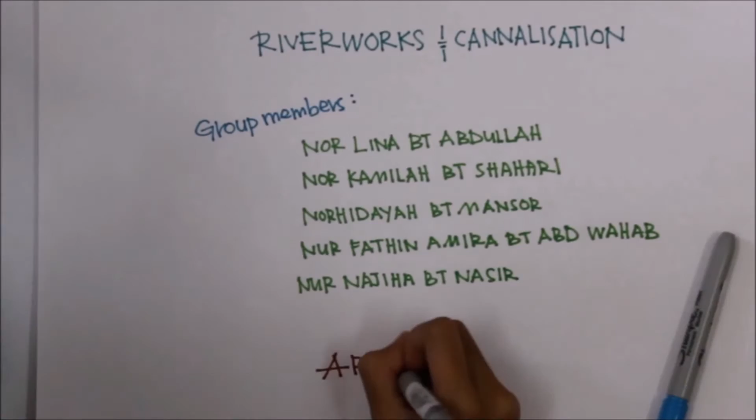So this is my group members, Nor Lina binti Abdullah, Nor Kamilah binti Shahari, Norhidayah Mansor, Nur Fathin Amira Abdul Wahab and Nur Najiha binti Nasir. And we are from AP 2246B.

Alright, now as for the introduction, I would like to introduce you to the canalization and what are the three strategies of canalization. Alright, so basically, canalization is a deliberate attempt to alter the natural geometry of a watercourse. And for the three strategies, we start with realignment.

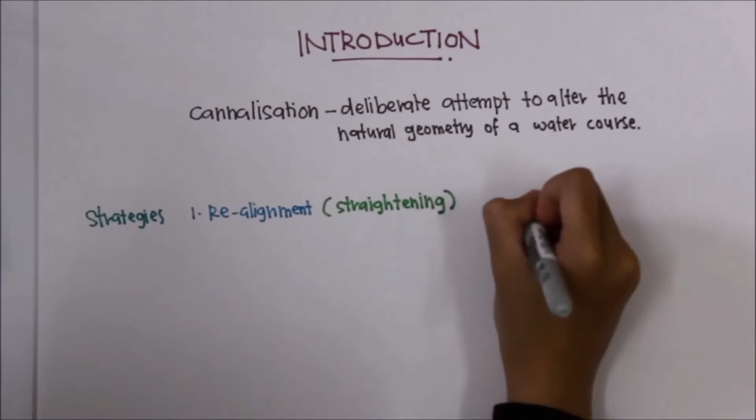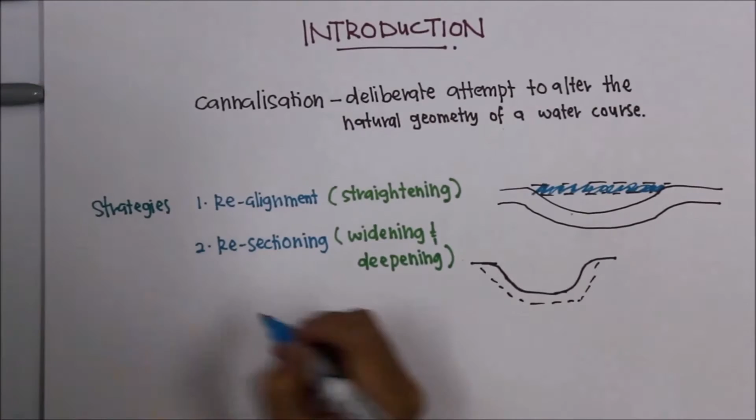Realignment refers to the straightening of the river channel and it removes the meander and reduces the length of the river channel. And the second one is resectioning. It refers to the widening and deepening of the river channel in order to hold more water. And the third one is bank protection. It is to prevent the flood from occurring and reduce the soil erosion along the riverbed.

Now let's move on to the advantages of the riverwork. The first advantage is increased river speed. Straight channel will increase the river speed and will allow water to flow faster. The fast flow of water also will wash away sediments accumulated on the riverbed. And the second advantage is improved navigation. Through canalization, it will make a stream more suitable for navigation by larger vessels with deep draughts.

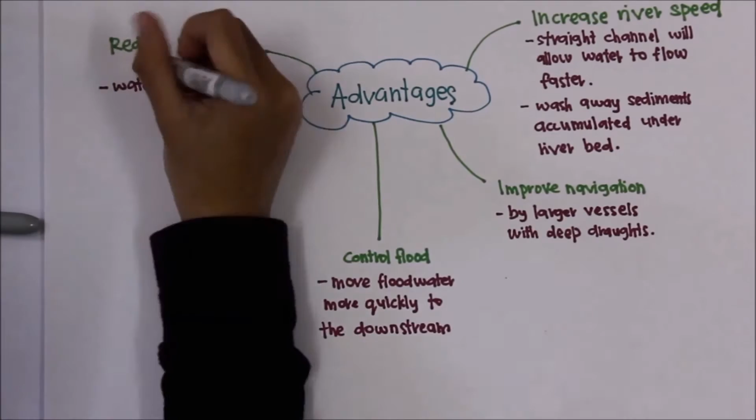And the third advantage is control flood. It is intended to move flood water more quickly to the downstream without spilling. And the last advantage is reduced natural erosion. After the curves are removed, the water can flow straightly and erosion can be reduced.

Alright, now we move to the disadvantages of the riverwork. The first disadvantage is flooding downstream. Canalization upstream leads to a high volume of water flowing to the downstream, thus leading to flooding. And the second disadvantage is accumulation of sediments. River carries sediments to downstream that results in less sunlight reaching the seabed, affecting the growth of marine life.

Besides, canalization may destroy the ecosystem during the construction. And it is also said that riverworks involve high costs as obviously it needs more resources and manpower to change the structure of the river. And lastly, it increases river erosion. The erosion of the channel may increase as the velocity or speed of the river increases.

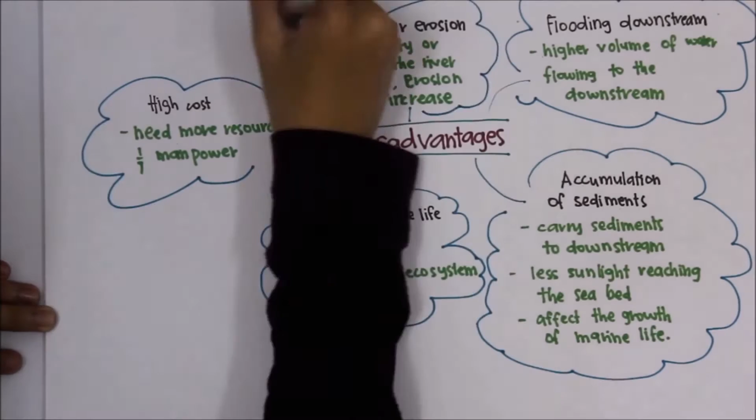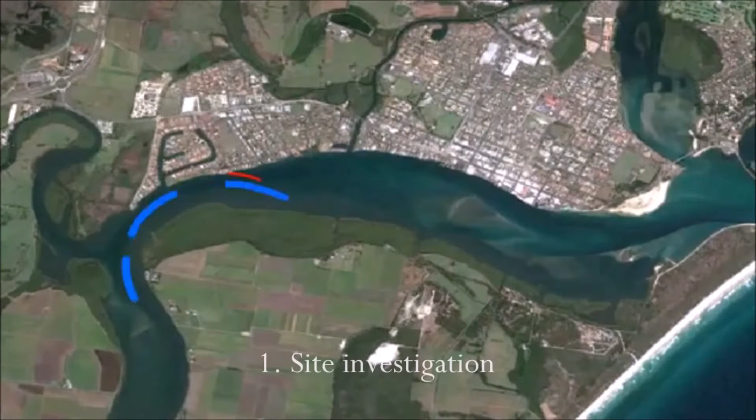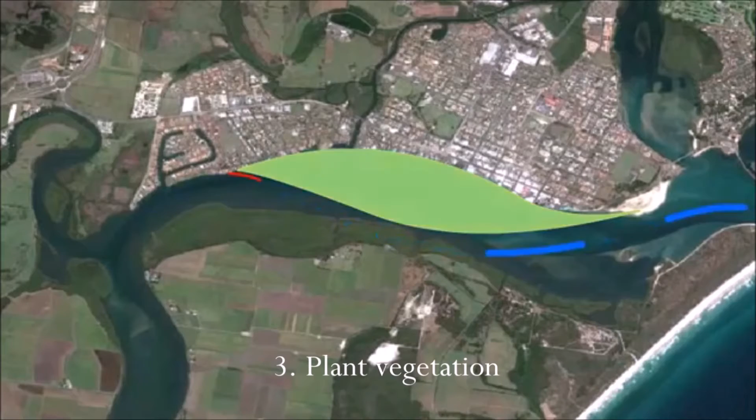Now I would like to show you the construction sequences of the riverworks. First, let's watch how the realignment works. You first start with the site investigation. It's done to gather all of the information about the proposed location. Then, reclamation will be done to narrow down the river. And then, plant vegetation can be done to protect the riverbanks against erosion.

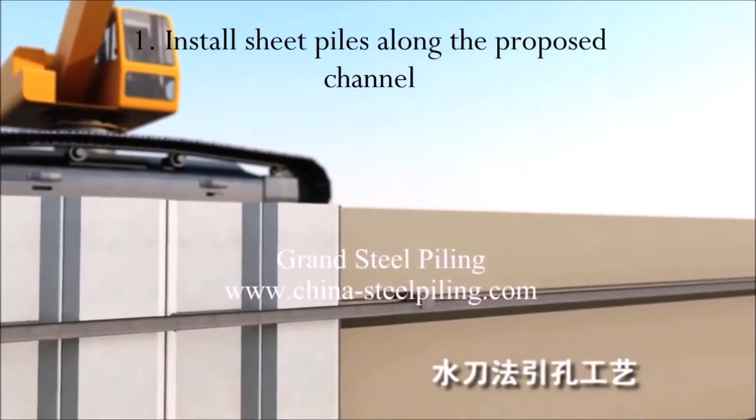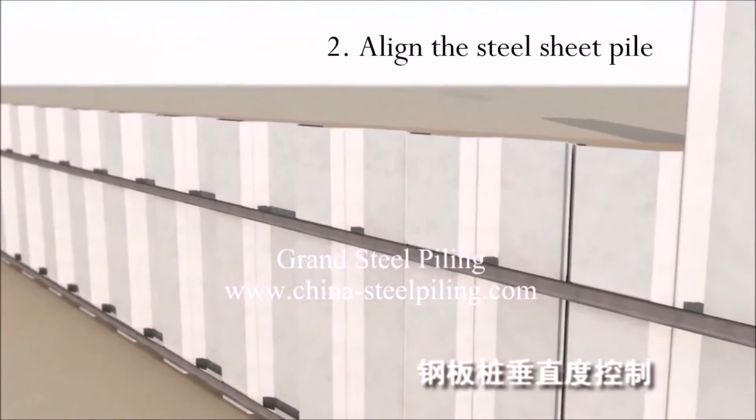Next one is resectioning. Sheet pile will be installed along the proposed river channel by using the vibratory hammer. The process proceeds with aligning the sheet pile along the proposed river channel. Sheet piles are installed in sequence to design depth along the planned excavation perimeter or river alignment, and then anchors can be included to provide additional lateral support if required.

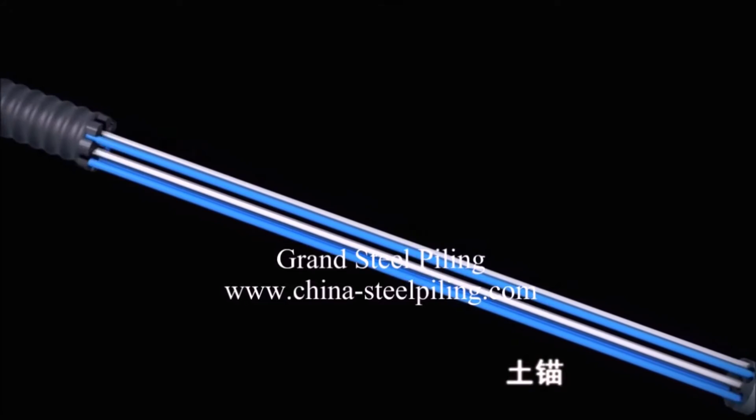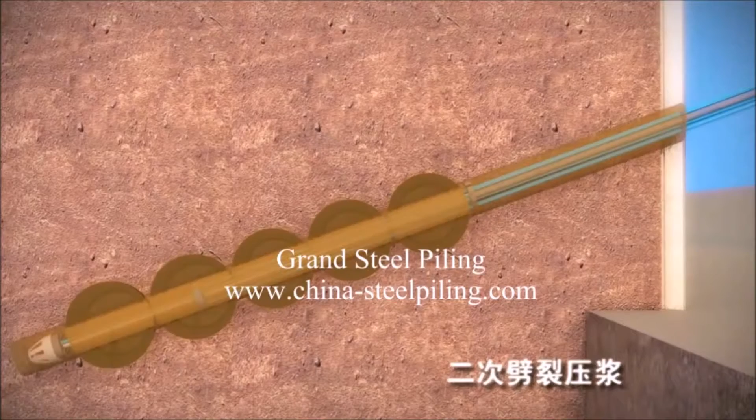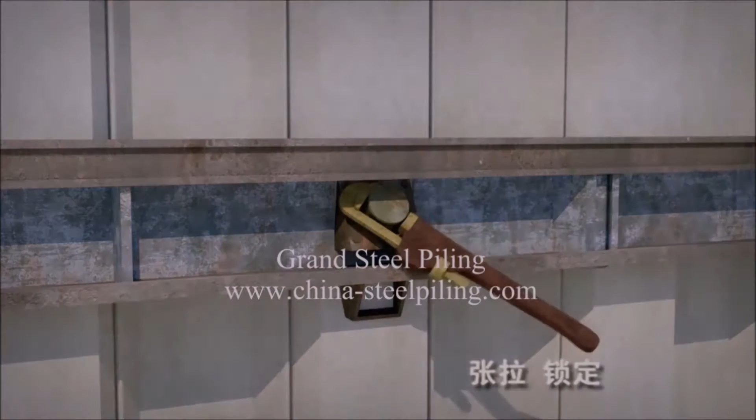The work continues with the dredging work. It is done until it reaches the required depth and width. All of the excavated material will be removed away from site to make sure that the site is clean.

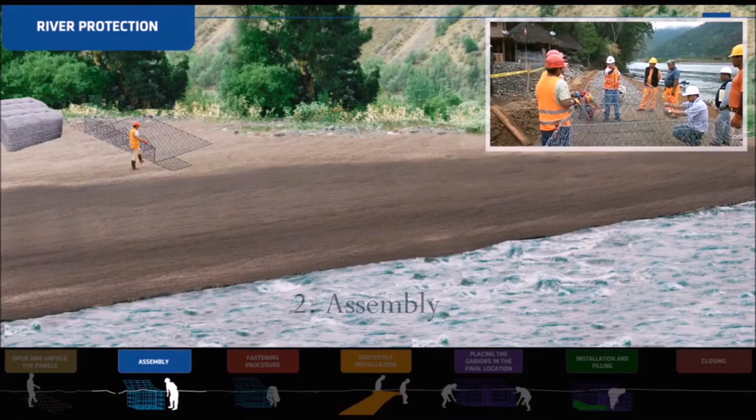Last but not least, riverbank protection. The first step is to open and unfold the panel. The units normally will be supplied in flat pack, and then the panel will be assembled based on the design that had been prepared by the engineer. Then, the cage will be fastened by using lacing wire or helical.

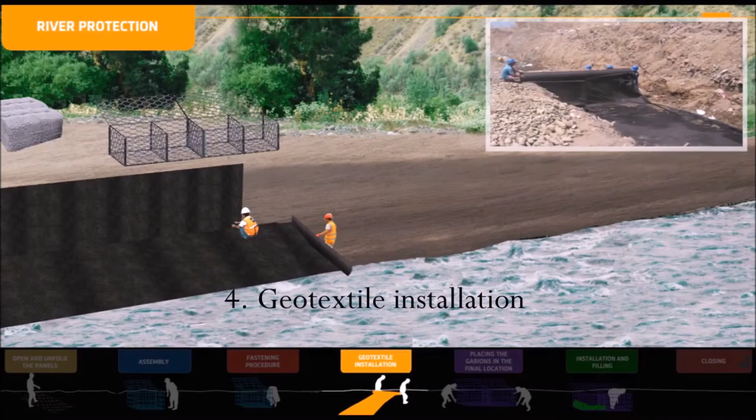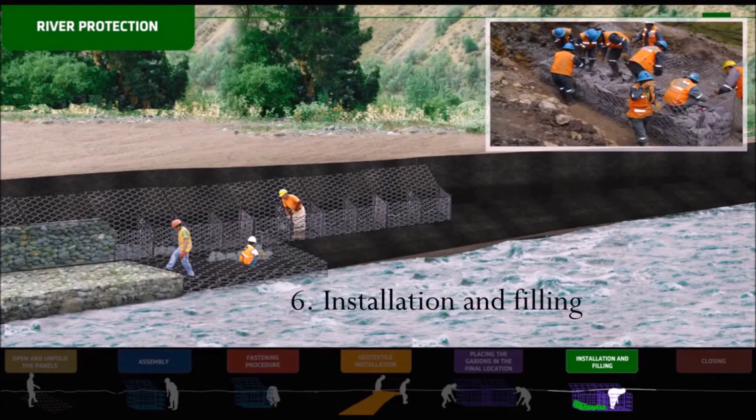Geotextile will be installed to increase soil stabilization and ground support, and then the gabions will be placed in the final location. After that, the cell will be filled closely with stone grading 100 to 200 mm. Lastly, after the gabion is full with the stone, the cell will be closed and tied closely.

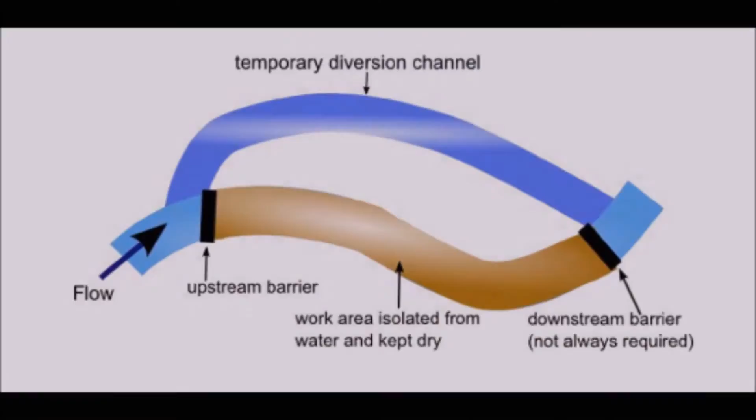One of the temporary works that can be used is temporary sheet pile. Sheet pile can be used as the temporary barrier to prevent the flow of water at that area. Second one is silt curtain. This temporary silt curtain is suitable for resectioning work to minimize sediment from being transferred downstream. And then last one is silt fence. It can be used to prevent the excavated material from moving into the river to prevent erosion.

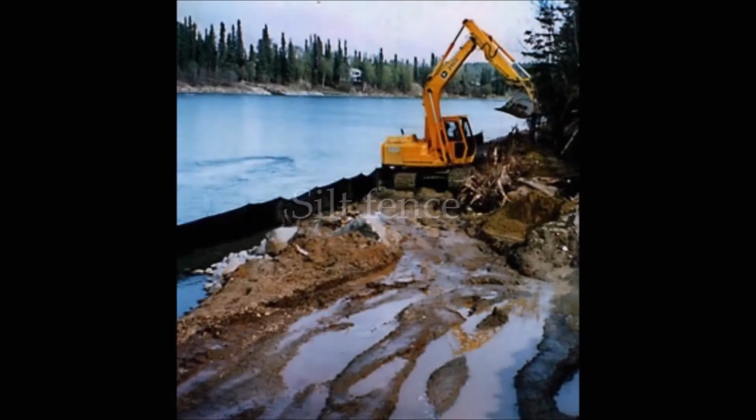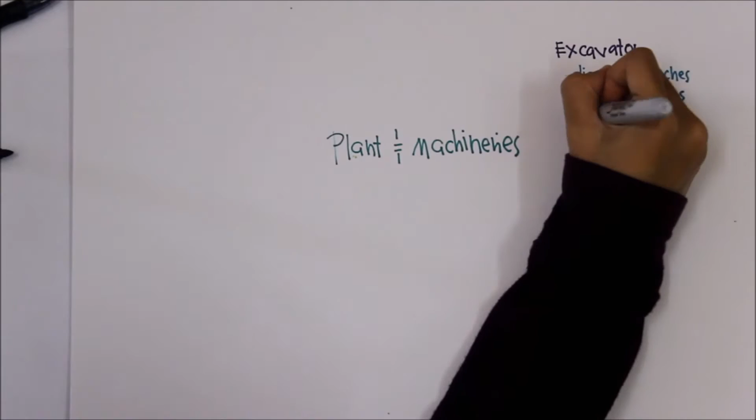For the plant and machineries, river works only involve simple plant and machineries. For example, excavator, it is involved in digging trenches and also to place the stones inside the basket of the gabion wall. And then bulldozer. Bulldozer can be used to spread the earth fill, clear the construction site before the construction of the river works starts, and to backfill the existing river.

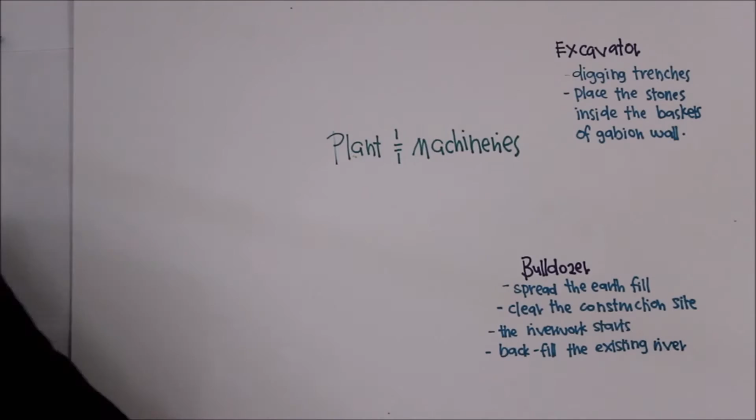And then, another plant involved is dump truck. It is used for reclamation works in the river realignment process. Another plant and machinery is vibratory hammer. It is used to drive the sheet pile.

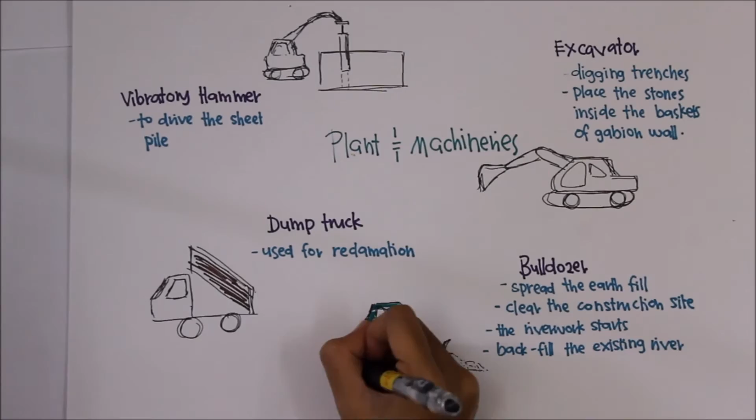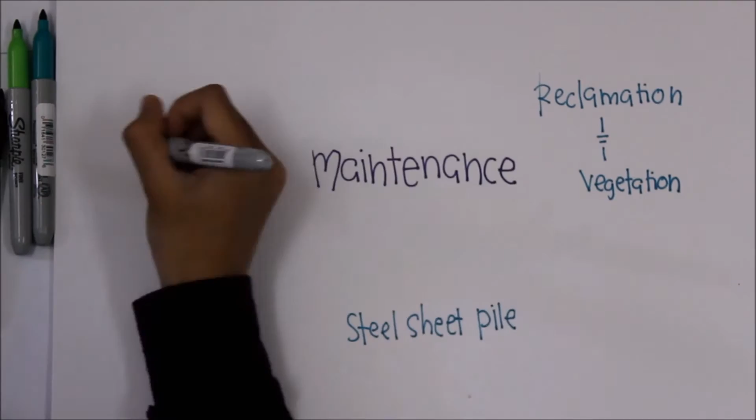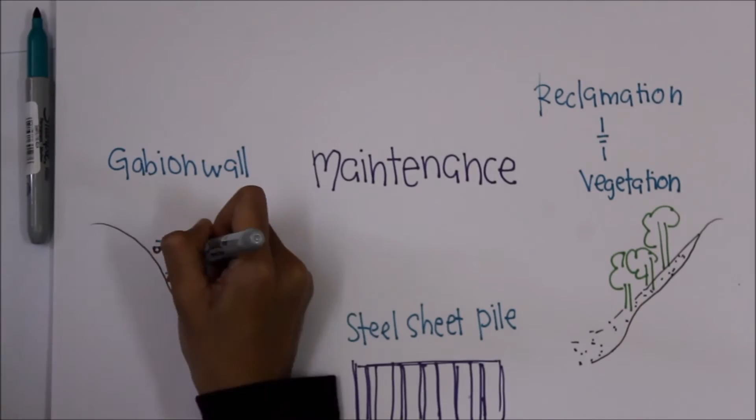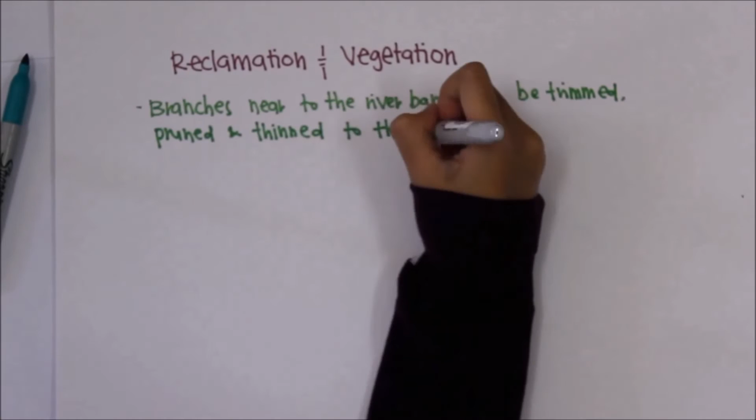So, different river structures may require different maintenance work, which in this video we only touch on the maintenance work for reclamation and vegetation, steel sheet pile, and gabion wall. Let's start with the maintenance of the reclamation and vegetation. Branches near to the riverbank may be trimmed, pruned, and thinned to the extent necessary in order to protect structures, maintain clearances, and provide views. Removal of branches for the purpose of providing view is limited to the bottom half of trees to help ensure the health of the trees.

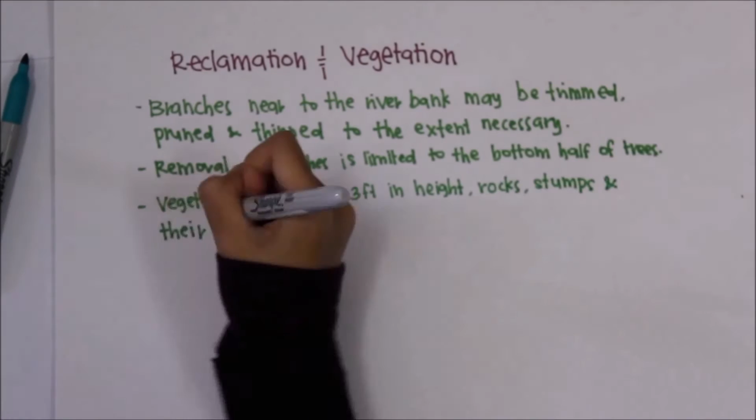Vegetation which is less than 3 feet in height, rock stumps, and the root system must be left intact in the ground. Diseased or unsafe trees may be removed at any time. For reclamation, eroded soil needs to be removed and placed at the existing reclamation area.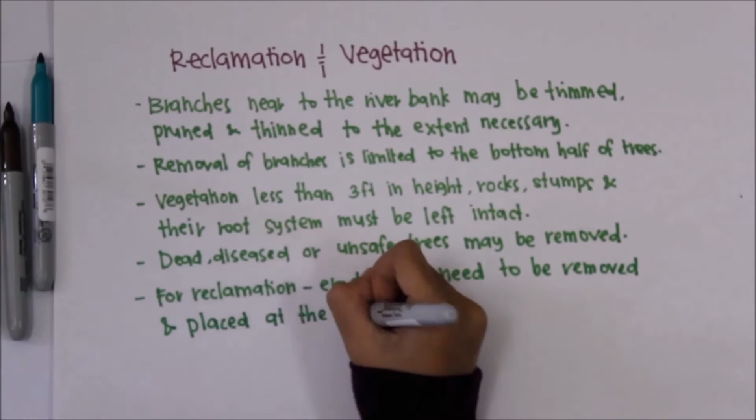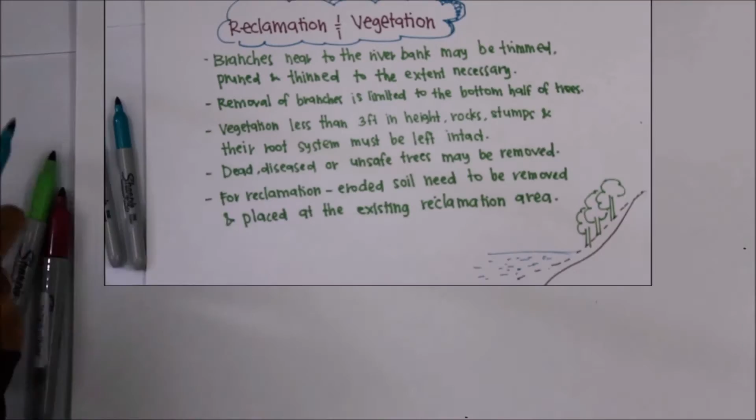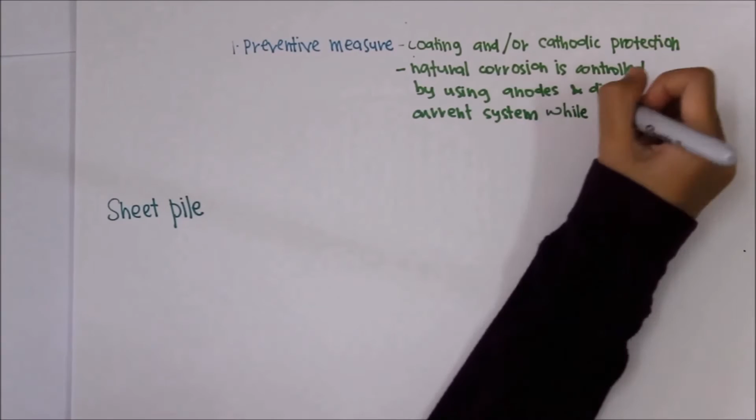For the steel sheet pile, there are basically two ways of maintaining it. The first one is by using preventive measures, which can be done by applying coatings and using cathodic protection. Natural corrosion of steel structures that are immersed in water or buried in soil can be managed and controlled by using anodes and direct current systems in order to stop the corrosion process while establishing the steel as cathode.

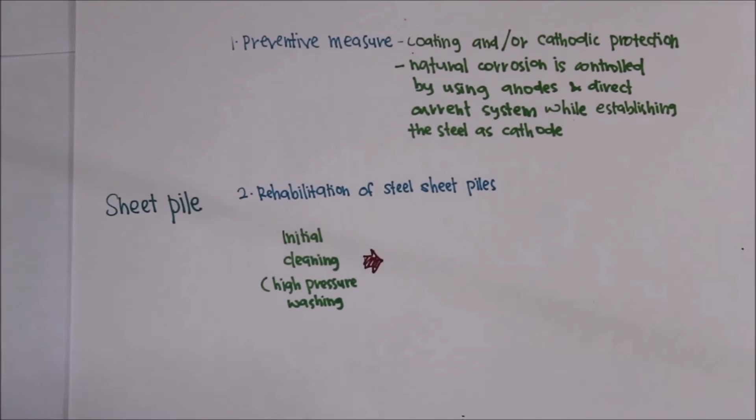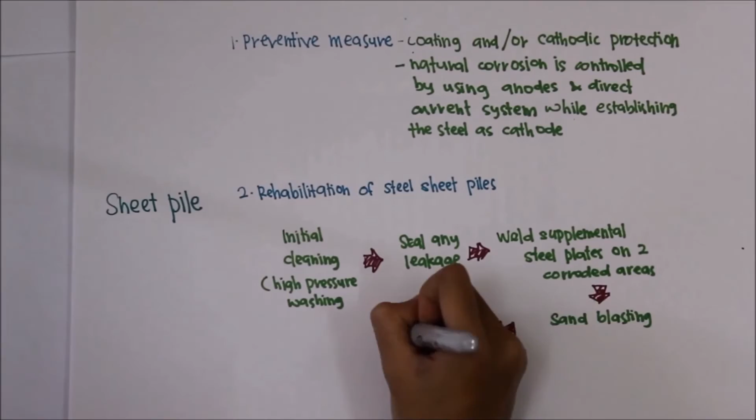And the second one is rehabilitation of steel sheet pile. The process starts with the initial cleaning by using high pressure washing, then sealing leakage, welding supplemental steel plates onto corroded areas, sandblasting, and then applying corrosion stopping coating to stop further corrosion.

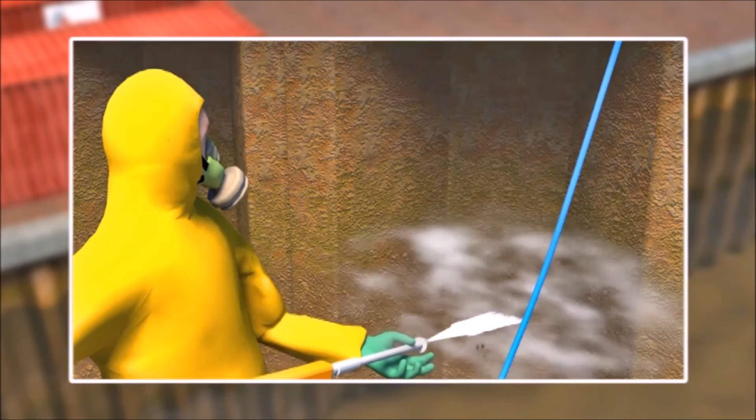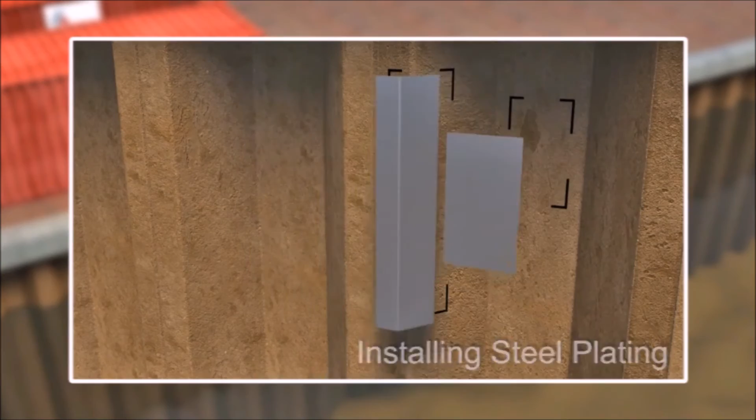Alright guys, now let's see how the rehabilitation of steel sheet pile is done. This is the first step, which is initial cleaning by using high pressure washing to remove the loose corrosion products on the steel sheet pile. Any leakage resulting from the initial cleaning will be sealed. And then, supplemental steel plates will be welded onto corroded areas to restore the structure to a good condition. And then sandblasting is done to prepare the clean steel surface for painting. Lastly, corrosion stopping coating will be applied to stop further corrosion.

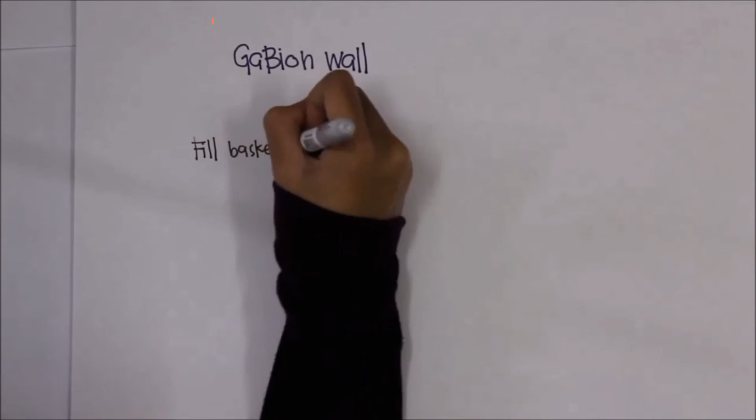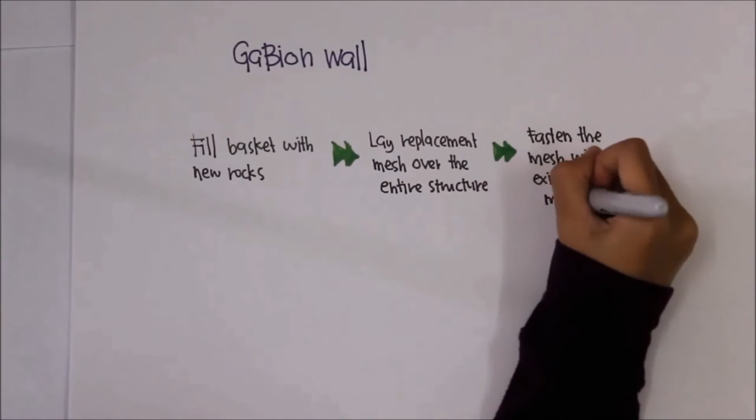In cases where the cage of the gabion breaks and causes voids in the gabion wall, these are the steps that need to be done to maintain the gabion wall: the baskets need to be filled with new rocks, lay replacement mesh over the entire structure, and fasten the mesh with the existing wire mesh. However, remember, care must be taken to repair any voids to prevent any subsequent motion and avoid any breakage in the rock fill.